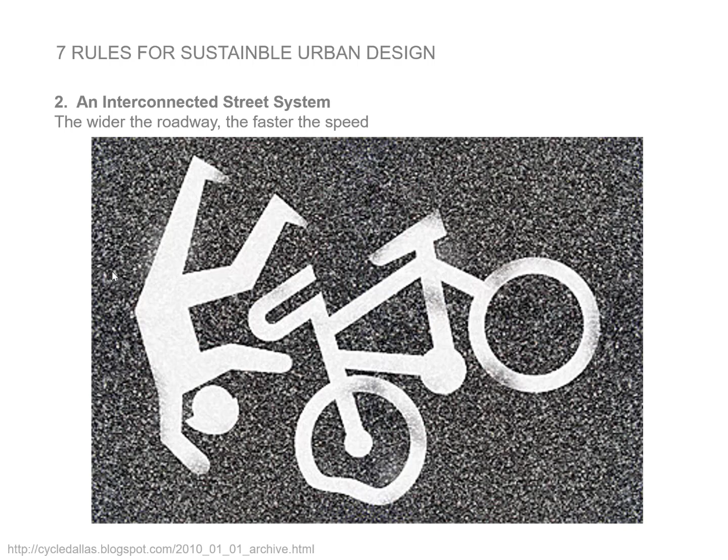Another important rule to understand is that if you design a super wide roadway, you're going to get faster speeds. So if you narrow the roadway, they're going to go slower. So if your speed limit is 55 and you have an absurdly wide street, people are going to drive way faster than the speed limit. The wider the roadway, the faster the speed, and you're going to get a lot more accidents if you're trying to create pedestrianization.

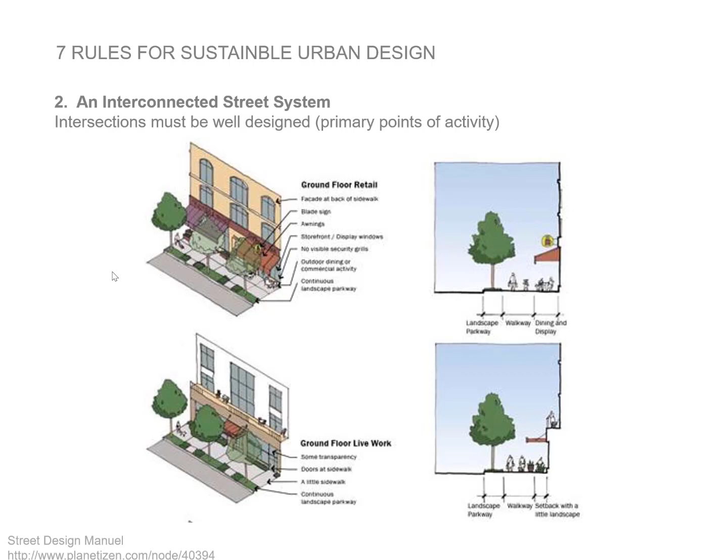It's also important to understand that intersections are these points of activity. So you need to think about, especially on your primary axis, exactly what goes on at those intersections. They need to make active commuter nodes and give intersections key things to do, especially along streets with high hierarchies.

But also, you have to take into account lanes and alleys because these things are how people get services. These smaller scale service outlets and routes that trucks, deliveries, and those type of things can occur need to be thought out as well.

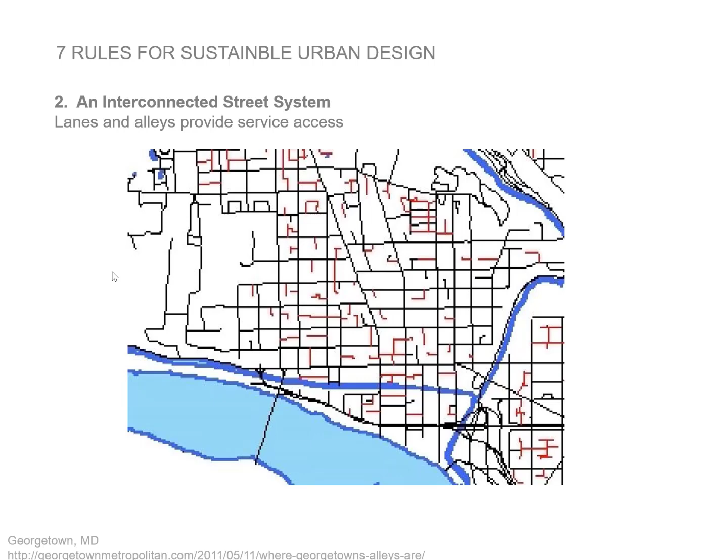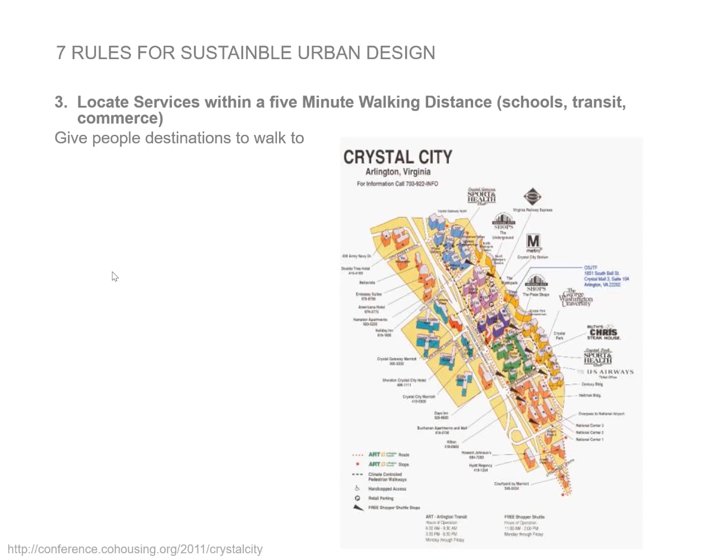As I said earlier, this is the third rule: we want to give people destinations, points of interest. Locate services within a 5-minute walking distance. 5 minutes apart is typically the maximum you want to get to a specific destination. It's not that everyone's going to go to that destination, but at least there's kind of landmarks along the way, which helps with maneuvering through the city.

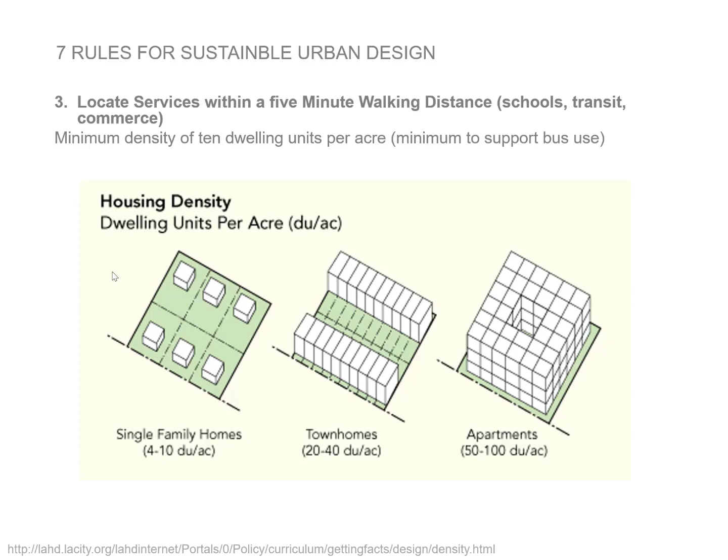If you want to support bus use, you need at least 10 dwelling units per acre. Looking at this layout, it gives you spatially a reference to 4 to 10 dwelling units per acre for single family homes. So you see 6, and townhomes can get you more, apartments can get you even more. Whatever housing you're going to, if you're going to have a bus route coming through, you're going to need higher density areas where that bus route is.

Also, think about this: you're going to be laying out green space designs, or green space networks, and in some cases you want to connect them. Think about the street as a linear park. Design the street as a hydrological and recreational facility, not just an automotive transportation facility. It can be multifunctional, a design corridor connecting spaces, not just a place for people to drive.

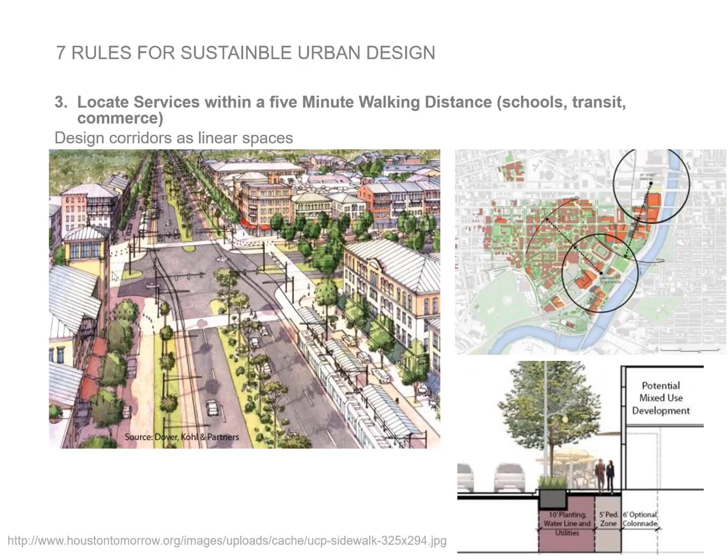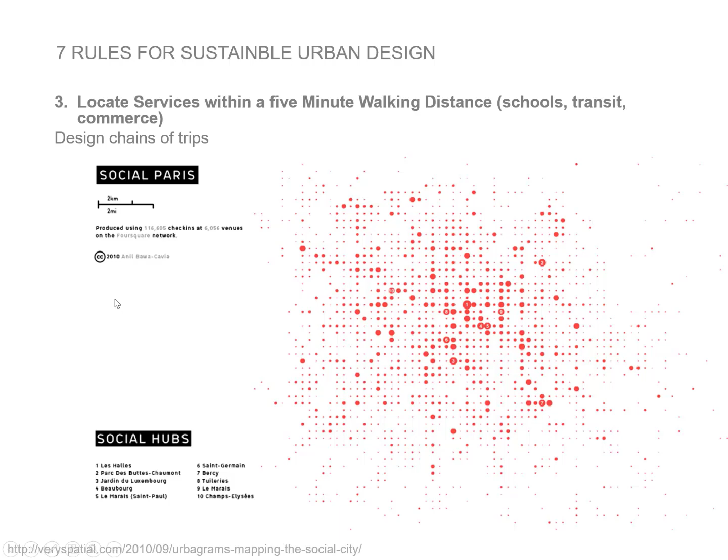So if you put these things 5 minutes apart, you're creating chains of trips. If you look at this infographic, these are different social hubs in Paris. You can see how close they are, arranged around the street. It's interesting to see how these different hubs are all very close together, and this is the way you should be thinking for these kind of urban design setups.

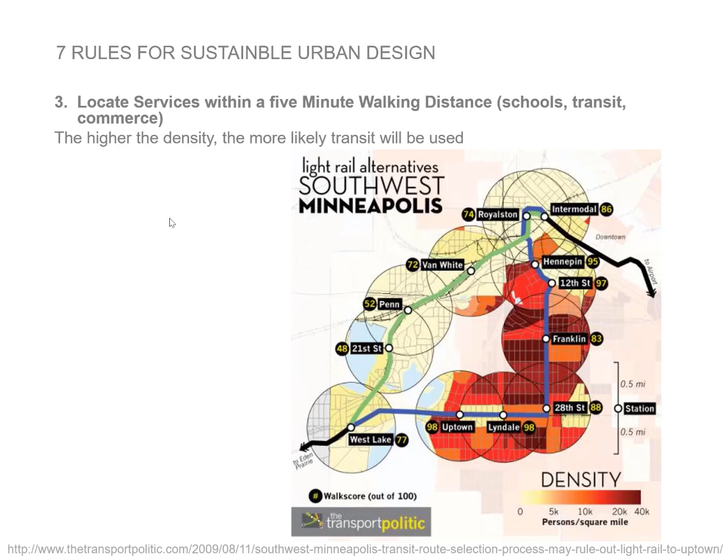As I said earlier, 10 is the minimum dwelling units per acre, but the higher density you can get—and I'm not saying the density needs to be a specific amount, it needs to be relative to where you're working. You don't want to put a 35-story building in an area with nothing but single family homes, but the higher the density, the more likely the transit is going to be used, and where the transit connects to—those are the things you need to think about. The more people you can get on transit, the more people you can get walking, using alternative means of transportation, the less climate impact you're going to have.

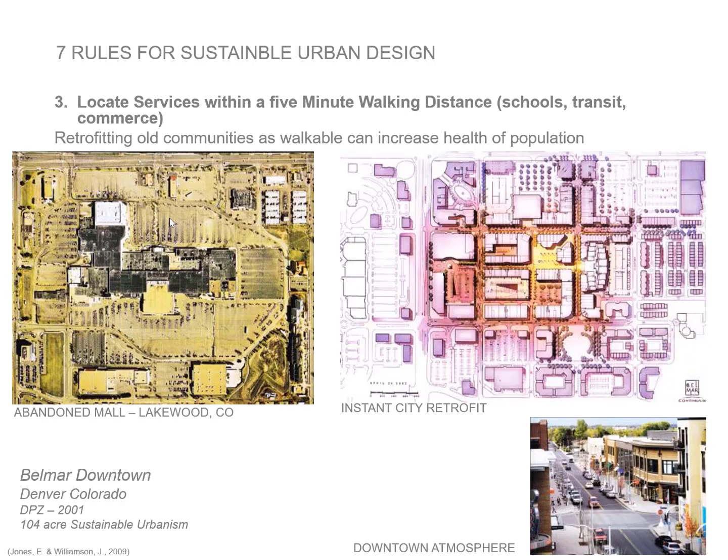Also, a lot of these places may have old buildings—big box developments, old abandoned malls, those kinds of things. You can retrofit these old buildings into new community centers. Just because there's a building there, especially if it's abandoned, doesn't mean you can't reuse it and adaptively reuse it into some sort of needed function. A good example here in Denver, where they took an old abandoned mall and created this downtown atmosphere, breaking it apart and retrofitting the structure.

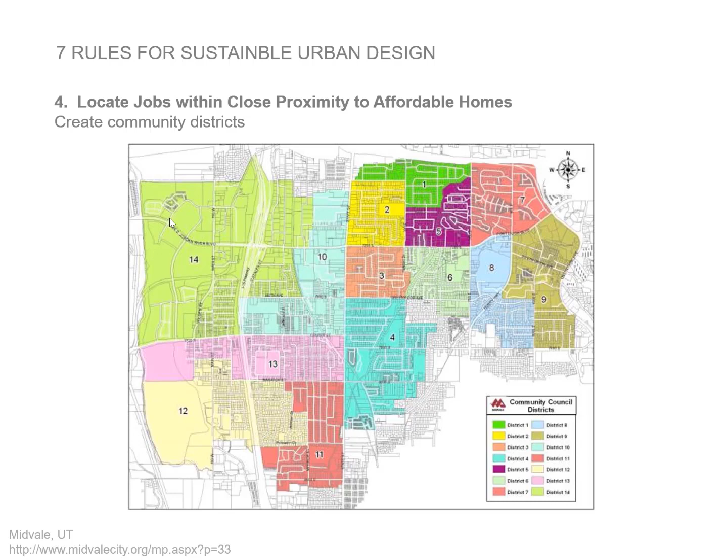If you can lower their driving or create alternative ways to get them to and from work, that's probably a much stronger and less negatively impactful approach. So what you want to do is look at the communities and create districts out of them, and think about what jobs, services, and programs fit within each district. A good approach is to define smaller districts in the neighborhood, and then apply your program accordingly.

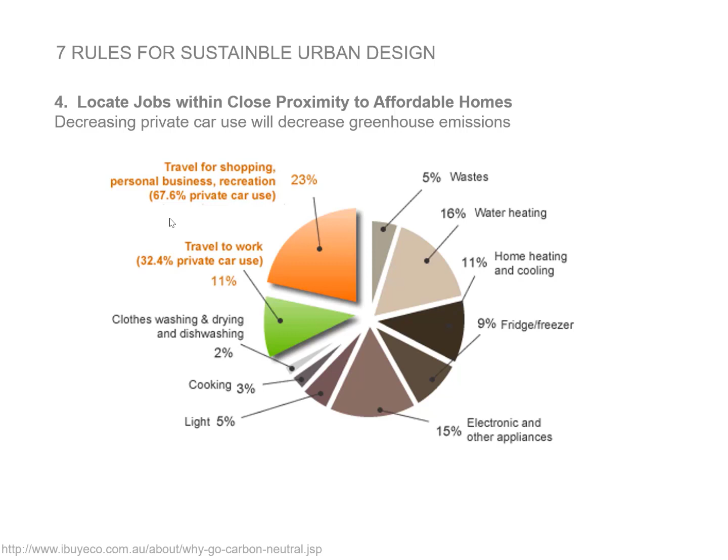But if you're thinking about jobs, not just the commute to and from jobs, but actual jobs themselves, you can have smaller scale local businesses tucked into new communities that aren't just giant manufacturing plants. Think about local businesses, local offices, and create space and programs for those in your designs.

What you want to think about doing is, especially where your site is, discourage one giant thing with some jobs in it, like a giant plant, but try to increase the number of jobs per acre. So think about it like that: how many jobs can I get per acre on average? I can tuck in small scale and medium scale, and place large scale focal points that are all different job creators, or job bringers, into the economy.

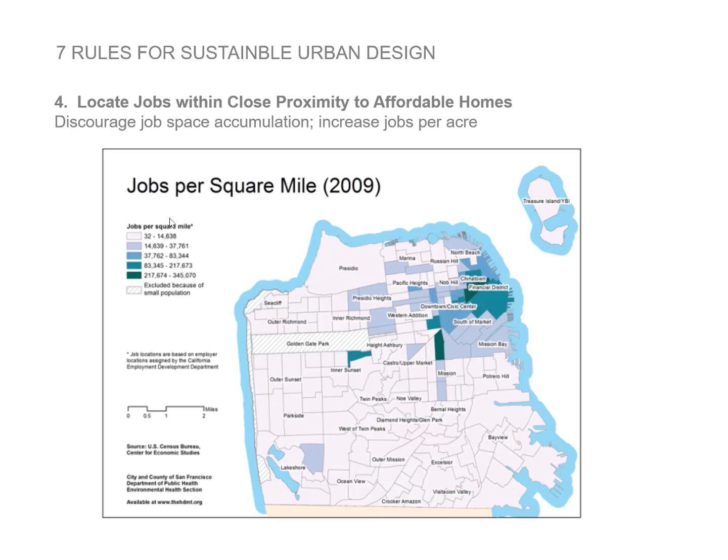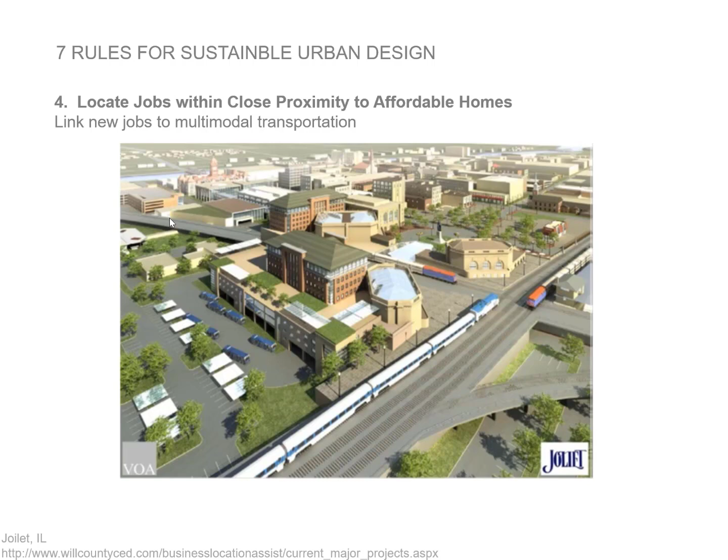And you want to link all those new jobs to the transportation networks that you set up. So place them along transportation hierarchy axes, or new kinds of networks that you put in, bus routes, those kinds of things, so people can utilize and get to and from work easily.

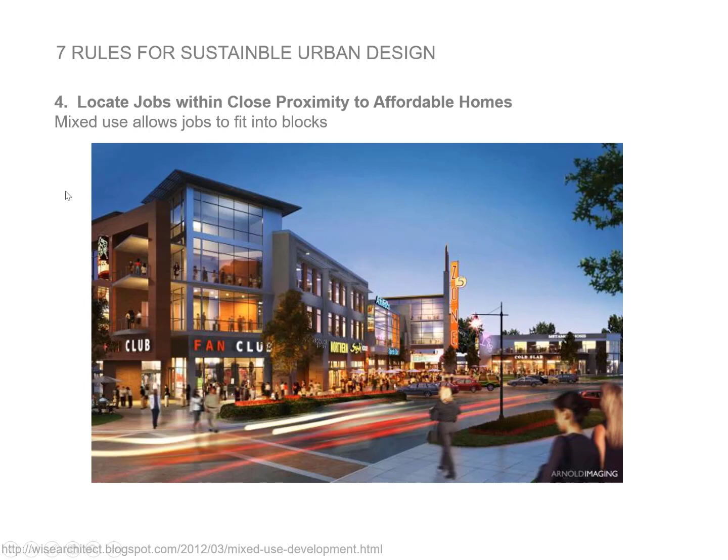And don't forget that mixed use allows for new jobs, but it also allows for housing and apartments and different offices, floors and floors of new jobs, and different varieties of new jobs. So what you want to do is think about using mixed use as a way to increase jobs per acre, especially around your primary intersections.

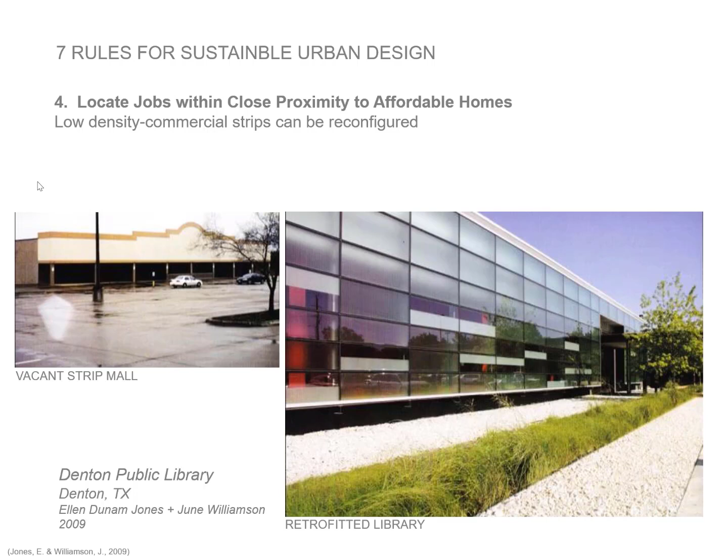If you have areas that are abandoned, again, just like the kind of mall we saw in Colorado - this is just an old strip mall they turned into a public library. So allow for community needs to be reconfigured and put into these spaces, and revitalize these areas.

One of the other things you need to think about, other than jobs, is actually providing a diversity of housing types. And I'm going to tell you why that helps communities. One, it's going to desegregate them by classes and income types. You allow multiple income levels to live in a singular neighborhood, and you start to diversify the population ethnicity type as well. Because if you isolate demographics, basically if you isolate income levels, you're going to get increases in crime in those same areas where lower income people are concentrated.

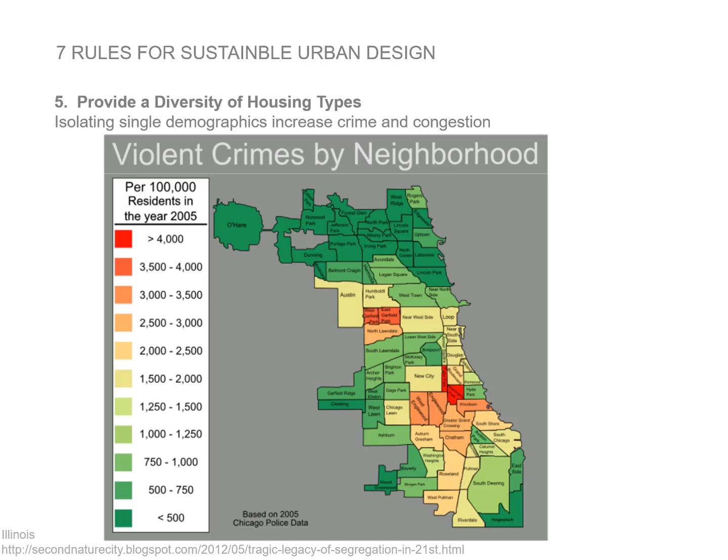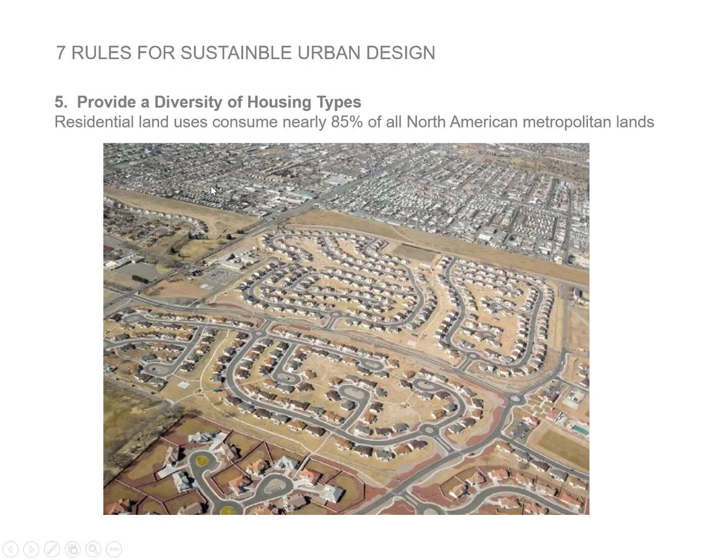So if you look at overall what we have in the U.S., residential land uses, singular regular residential land uses consume about 85% of all North American lands. That's a boatload of the North American land uses, and a lot of them are these single family kind of suburban sprawl type setups. So the way they're set up now is that every house has to have sidewalks and driveways and rooftops and roadways connecting it, all these kinds of things.

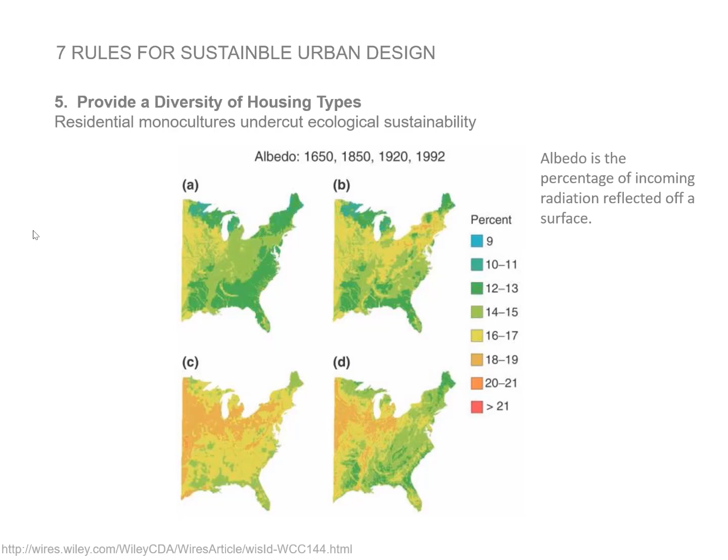So what that's doing is making the Earth's surface increase exponentially because of all these impervious surfaces. So you're actually, if you develop like that, increasing the heat island effect globally and contributing to increases in temperature. So what they also do is cut out a lot of the locally owned businesses you could put in.

Basically, if you spend $100 at a locally owned business, three-quarters of that is going to stay in the local economy. But if you spend $100 at a non-locally owned business, less than half of that's gonna remain in the local economy. So you basically get a third more of the money to spend in a local economy.

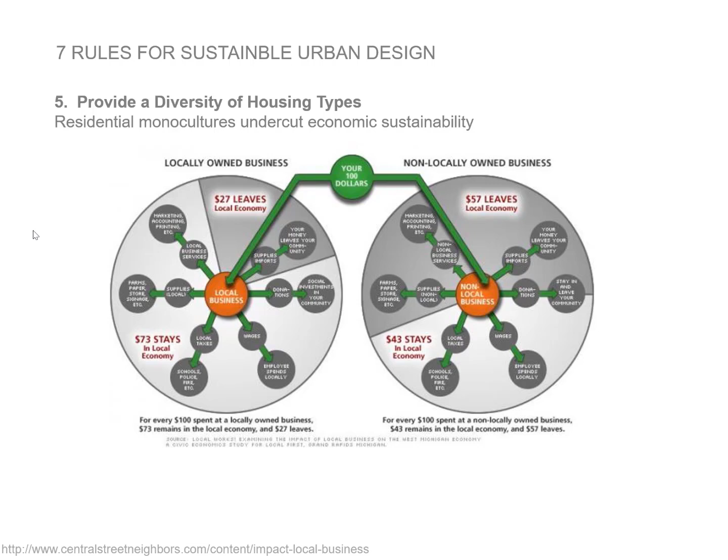So if you're not creating local economies and you're just putting in only single family residential, you're losing those kinds of things. And the infrastructure required for that type of single family development is increasing greenhouse gas significantly.

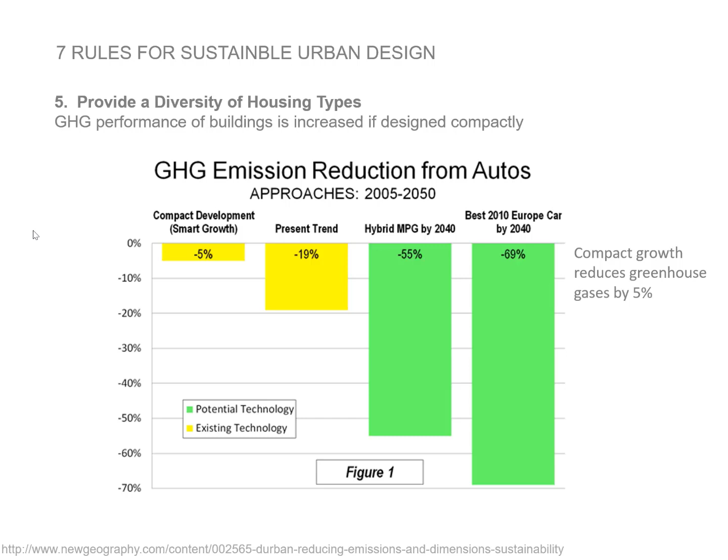So if we design in these kinds of nodes of development more comprehensively, compact growth has been shown to reduce greenhouse gas emissions by 5%, which is a pretty big chunk if you think about all the development that we have in the U.S., or globally, really.

So if you're going to put in a diversity of housing types, you want to connect these houses to all the different jobs and specific functions and things that they're doing in the neighborhood to increase walkability. And you want to use street trees to help do that.

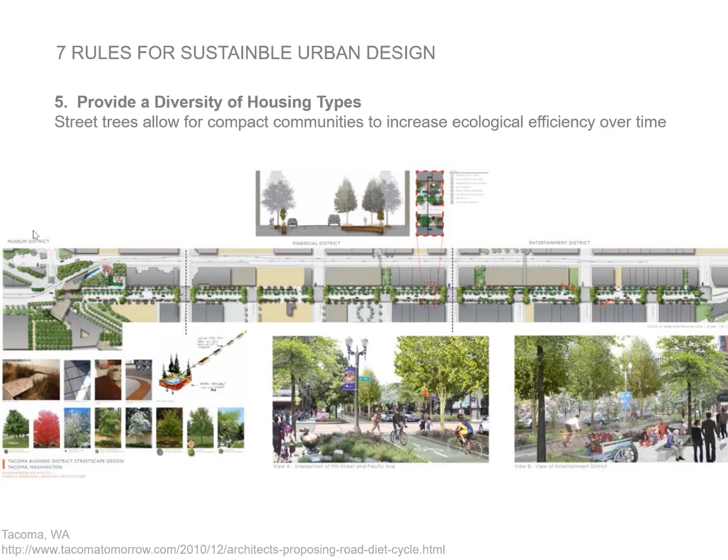So they allow for compact communities to increase ecological efficiency. So you have a compact community, which is decreasing the greenhouse gas emissions. And you have less infrastructure needed because it's all kind of in these denser nodes, and you're starting to put in these ecological pieces to help decrease the impervious surfaces. And over time, it just gets bigger and bigger - plants grow, so ecological services increase.

But the main thing, once you do all this stuff, is that you're not creating a monoculture of housing types. So various houses, varying housing types, are more adaptable to change. And you say, why is that? Well, what happens is you're not catering to one income level. And if that income level gets hit by a recession, then the whole neighborhood's kaplunk - the whole neighborhood's abandoned. But if you have multiple housing types, then it can absorb the change or recessions or whatever a lot easier.